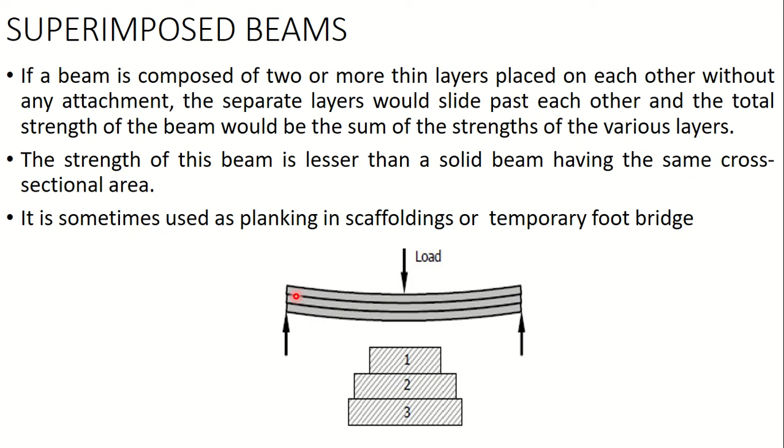Now, kadalasan ginagamit yan pare-parehas na species ng kahoy, or pare-parehas yung modulus of elasticity. Then we have also the moment of inertia of the whole beam is just the sum of the inertia of each plank. Okay, so the assumption here is that the curvature is constant. Therefore, the total curvature is just equal to the sum of the curvatures of the individual.

Okay, that's why M1, the moment capacity of the first plank, is just equal to the total moment capacity of the beam times the modulus of elasticity times the moment of inertia divided by the total modulus of elasticity and the total moment of inertia. However, if E1 is equal to E, like in this case, then magka-cancel out itong dalawa. M times I1 divided by I na lang ang matitira.

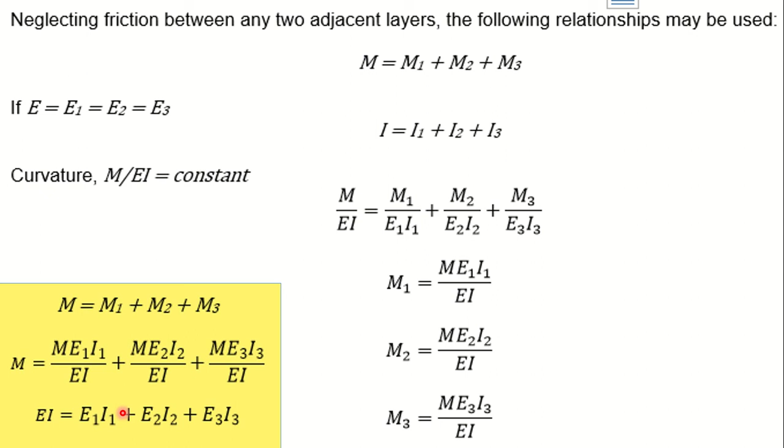So, mas-simplify yung problem. And ganun din sa moment ng second plank. So you could use mas maraming planks kaysa tatlo, or pwedeng dalawa lang. Okay? Now, if this is not the case, hindi equal yung kanilang moduli of elasticity, meron tayong EI, i-add natin lahat ng the sum of the product of the modulus of elasticity and the moment of inertia.

Okay, so we will have this example. So we have a 75 mm by 300 by 7.2. So the span is 7.2, and we have the section 75 by 300 mm. Okay, and a simple support is not sufficient to carry the loads imposed upon it. So it is not sufficient enough to carry the load, so we need another plank.

So it is to be used by two men in removing concrete forms on the side of a concrete structure. Each man has a weight of 55 kilograms, but one of them can carry 80 kilograms, while the other can carry only 35 kilograms. Okay? So these two men will at no time be closer than 1.2 meters while moving along the plank.

Okay? So pag nagtatanggal ng forma, syempre nagmo-move yung ating mga tao doon, no? Sa may plank. So that is a case of moving loads, di ba? So we'll consider moving loads. Tingnan natin kung ano yung maximum moment na ma-produce at anong position ng dalawang tao.

Okay, neglecting the weight of the planks, determine the nominal thickness of another equal length and width of gang plank to be placed on top of the 75 by 300 mm gang plank, if its allowable flexural stress is 9.68. Use the same material for both planks. So, hindi kaya ng isang 75 by 300, kaya dadagdagan natin yung plank. So, anong thickness?

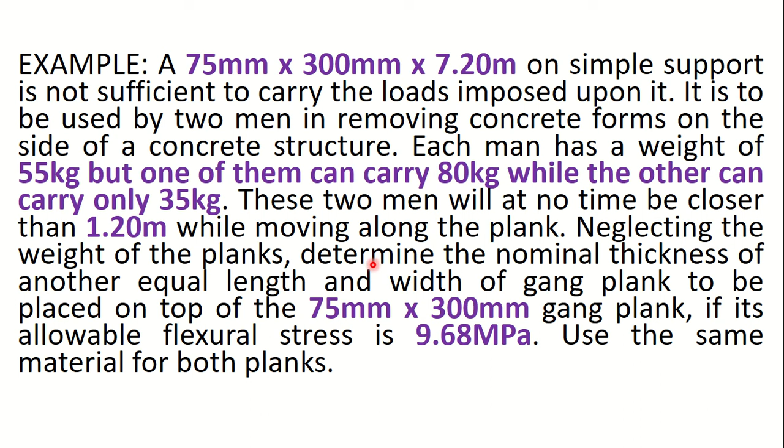So, this is the solution now. So, this is a case of moving loads. Reviewin nyo yung inyong structural theory. Pwede rin sa may mechanics of materials or the strength of materials.

So first, we need to convert the loads from kilograms to newtons. Okay, so this is the load from the first man. So 55 kilograms siya. Kaya niyang magbuhat ng 80 kilograms. 135 kilograms, convert to newtons, multiplied by the gravitational acceleration. So we have 1324.35 newtons. Ganon din sa second man. 55 kilograms siya, kaya lang 35 lang ang kanyang kaya.

Siguro magaling manigarilyo ito, kaya ito lang kaya niyang buhatin.

So 90 kilograms ang total multiplied by, again, the gravitational acceleration. We have 882.9 newtons. So of course, the resultant weight of the two men, including the load they can carry, we have 225 kilograms. So ito, 135 plus 90 is 225 kilograms. Multiplied by 9.81, we have 2207. Or we could just add these 2, okay? And 2207.25 newtons. Okay? So taking summation of moments at point B to solve for x.

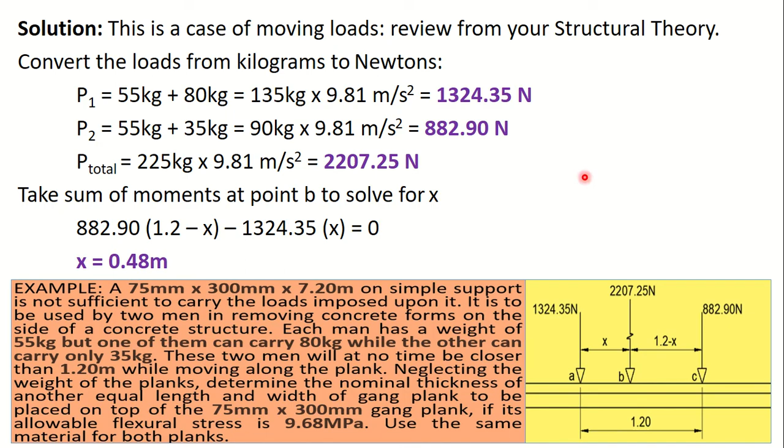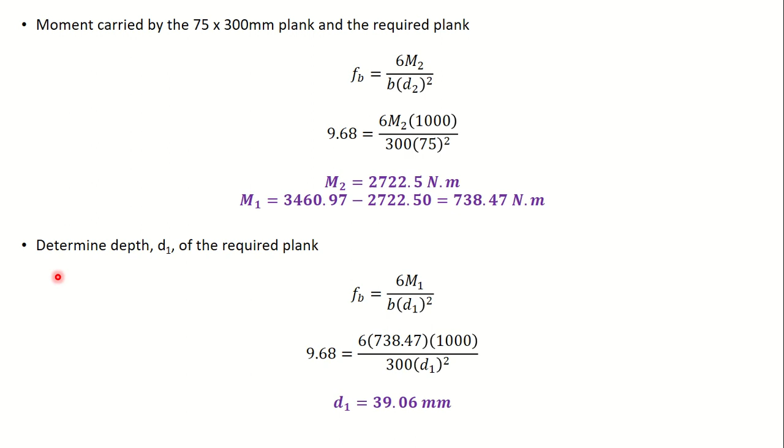Pero pag pumunta tayo sa hardware, bilihan ng kahoy, wala namang 39 na makukuha tayo. So, ang nominal size na kailangan natin siguro ay 50 by 300 na plank. So, i-try natin, i-analyze natin ulit. So, I1, the moment of inertia of this plank is this one. And the moment of inertia of the given plank is this one. So, the total moment of inertia is this. And then, i-recompute natin yung M1, since pinalaki natin, imbes na 300 by 39, ginawa nating 50 kasi ito yung size na available commercially.

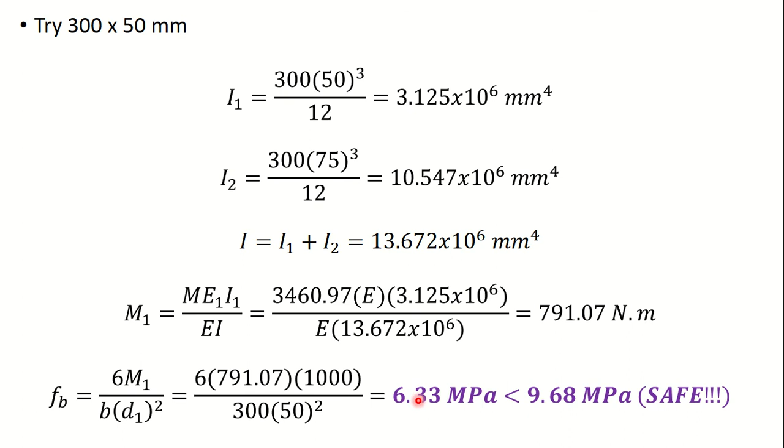Itong Young's modulus of elasticity ay parehas lang kaya mag-cancel out yan. So, meron tayong 791.07. Kanina, yung lumabas ay 738. So, mas lumaki yung moment capacity natin. Para ma-check natin, kunin natin yung flexural stress. The required plank flexural stress is 6.33 MPa, which is less than the allowable, kaya safe siya. I-check pa rin natin yung second plank. I-recompute natin yung M2, 2669.90. And the flexural stress is 9.49 MPa, which is also less than 9.68. So, it is still safe.

Therefore, use 50 mm plank on top of the 300 by 75 mm plank. So, ganun lang yung ating example. Ganyan mag-solve ng superimposed beam.